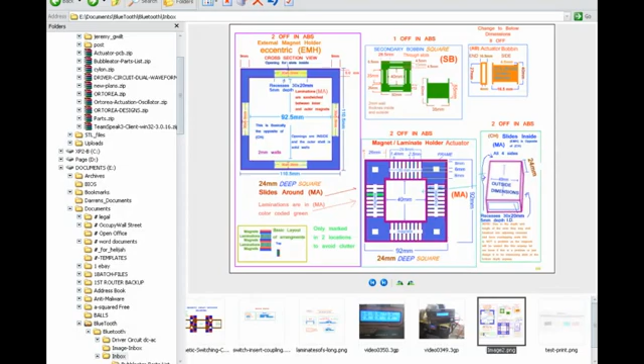Should be live now. Okay, well I'll still be making some changes actually. I need to go back on a minute. And let me just check my audio because I'm not sure if... oh yeah, I'm on the right audio. Can you hear me, Alan? Because I'm not monitoring myself right now. Okay, audio's working. All right.

Right. I'll try to explain it. Let me just get this box out of the way. I'm just going to take a still image so I can paint on this. Okay. This box here. This is a magnet laminate holder, right? There's two of those, and these go on each end of the secondary bobbin, which is this one, right?

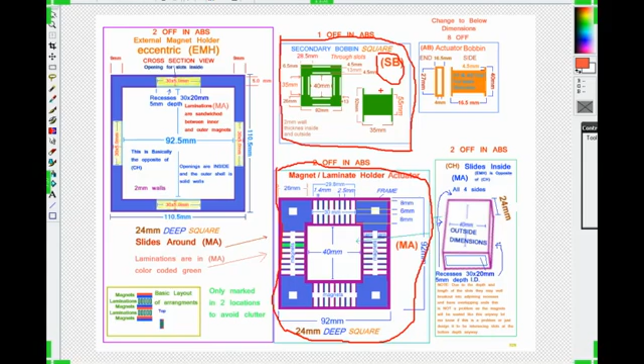So, like I say, magnet laminate holders. There's one on each end of the secondary bobbin, which is SB. That one. Okay, so that's in the middle. That's where the windings are put on that secondary bobbin SB. The main secondary windings for generating the power are actually on that green bobbin, right? I've actually changed the colours a bit on here.

Right, now the actuator bobbin. Let me just clear the screen again. Now the actuator bobbin, ideally I need 4 of these on each end, and they actually go on the ends of the magnet laminate holder. That's the MA. So these actually go around.

Now this is where I've been having some problems because I might have got my dimensions wrong or something, but they're supposed to be... Let me just zoom in. Why is it zooming in? I can't zoom in properly. Just a minute. Right, that's better.

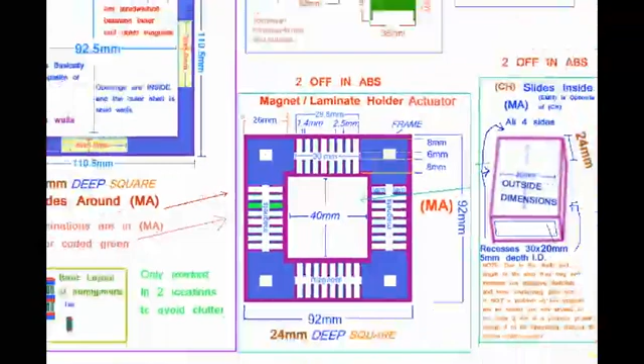Right, those actuator bobbins, one goes across the laminations there to actuate those cores, and another one goes underneath to actuate those cores. But I've been worried about overlap, where they collide with the other ones, which actually go down here. Right, so the actuator bobbins actually go on the ends of the laminations that stick out. So there might be some overlap problem, and I've been looking at changing the sizes a bit.

I certainly don't want to start making my green secondary bobbin and my magnet holders bigger because that's going to mess everything up, because I'm going to have to change everything. The only way to do that is to make the actuator bobbins smaller, and that's probably what I might do. I already made them a little bit smaller. So anyway, basically they all go on the end of the laminations that stick out.

Right, so when you change one dimension on one thing, it affects everything else, right? And obviously they're down here as well. So if I change something, it changes everything else. Now this particular here, this CH. Let me just clear my screen again. Now CH, this thing here, this is the central core. This holds magnets in these slots here, right? There's magnets in here.

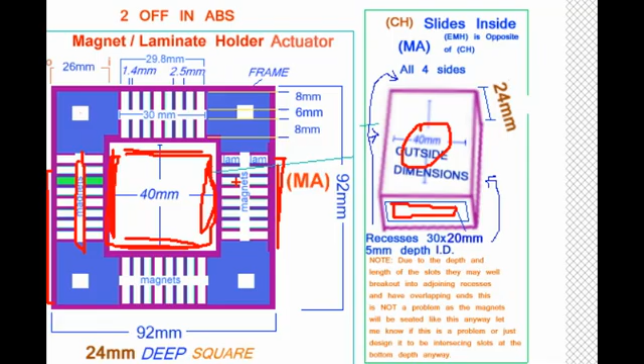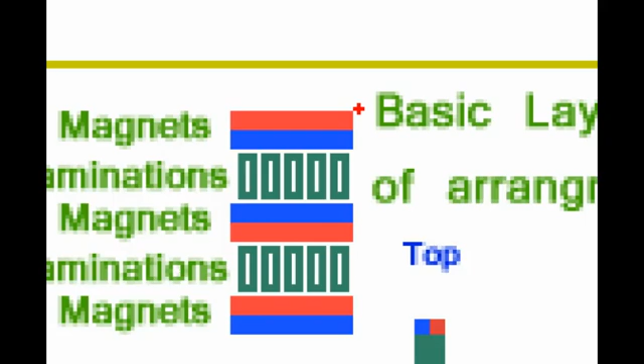So I'm basically making a sandwich of magnets, and if you go down to the bottom sketch down here, that shows you what I'm trying to do. Basically there are magnets on the outside, on the inside, oops, this has got big, and on the out, yeah, you know what I mean. Anyway, I think that probably explains it best.

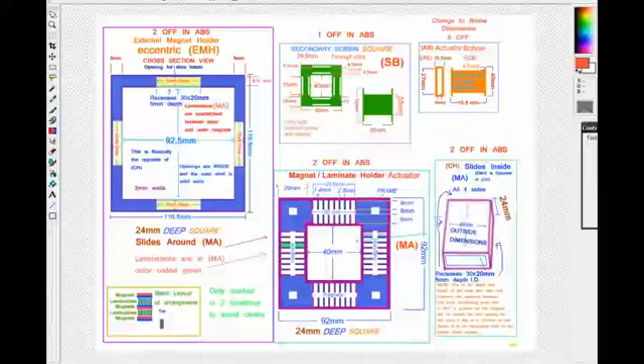Oh, okay, sorry. Slow, did you say slow down? Height. Hang on. Height of secondary bobbin?

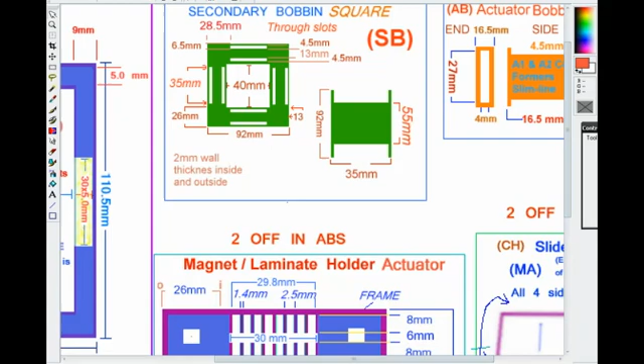Well, the secondary bobbin is basically 92 millimeters by 92 millimeters, you know. It's 92 millimeters this way, it's 92 millimeters that way, and it's actually 35 millimeters tall, right? Because we're looking on the side of this. This is the side view.

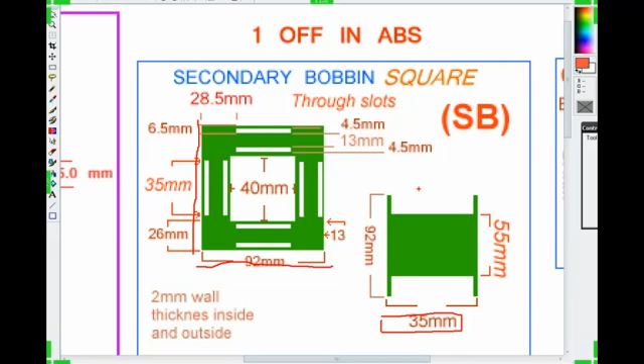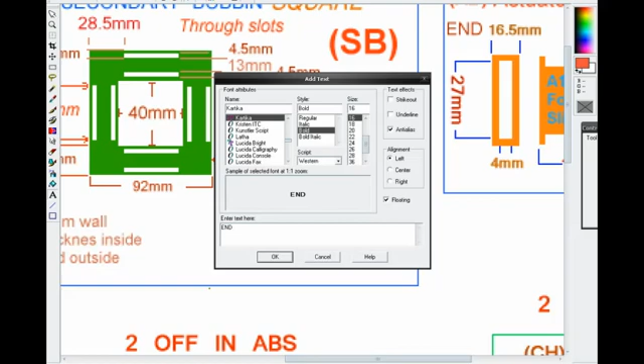I probably should have put that on the drawing, really. Let me just put this on the drawing anyway. This is side. That's the side of it, and that's the end. End view of it. Does that answer that question?

Let me just save that as well, because I made some changes to the AB bobbin. If you look, I've made it smaller, 40 millimeters, 40 millimeters, and that lip is the same. It's a 4.5 millimeter lip that goes all the way around there, but it's kind of difficult to draw it on a flat image. My other 3D print guy had some problems with that, but I told him what, and he just adjusted it. But the trouble is, I think I made it a bit too big.

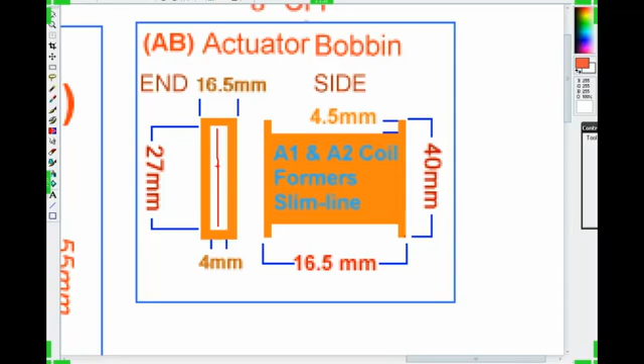So the original drawing was, I think it was 48 or 46 or something. Anyway, I shrunk it down to 40 millimeters, and I'd rather skip using some of the laminations in this section here, right, than have it overlapping over this section here, because I made it 40 because it's going to be like 40 millimeters up to that edge, and I might actually have problems when the other one overlaps there. So yeah, it's all this measurement stuff. It's very confusing.

It kind of gets very confusing sometimes, and you get little mistakes that creep in. But I'm not too worried about that, because I might actually have to make that a bit smaller, but then I might have to skip putting laminations in one of these ends here. So if I have no laminations at these two end points, I'm not too worried, because the flux is still going to be channeled by the majority of them anyway in that section.

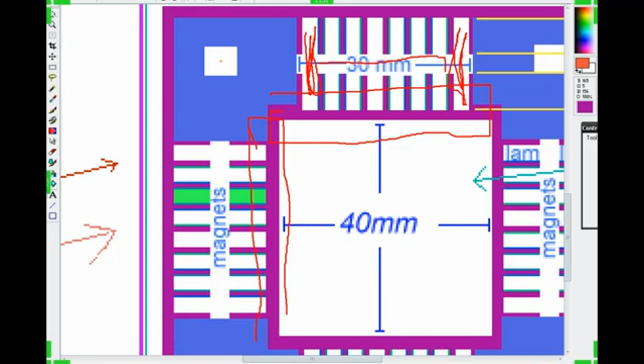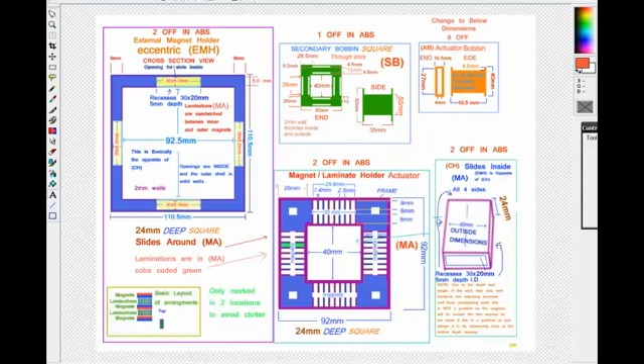Oh, the side view shows 55mm thick. Hang on a minute, have I made a mistake? A side view. Let me have a look. I might have made a mistake. Yeah, you might have spotted something. It's 35mm. Oh, hang on a minute. No. 55mm, that's the inside diameter of the bobbin. That's where the wires are sitting.

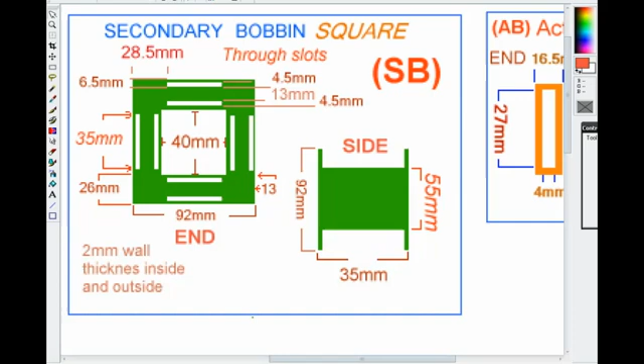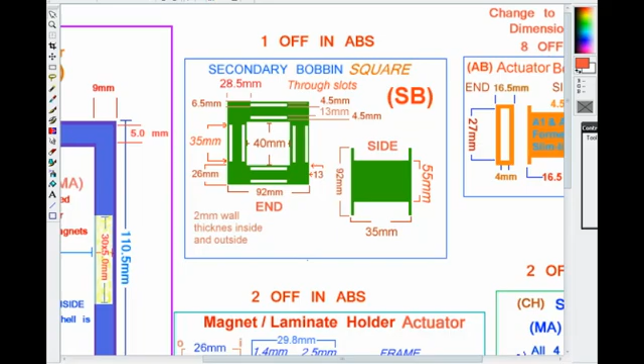Let's see. Just a minute. Oh, right, hang on. The best way to understand this is to look at the actuator bobbin, the actuator for the magnet holder, right? Yeah, I might have made some kind of a mistake. Sometimes I don't notice these things. The windings have to sit above the laminations.

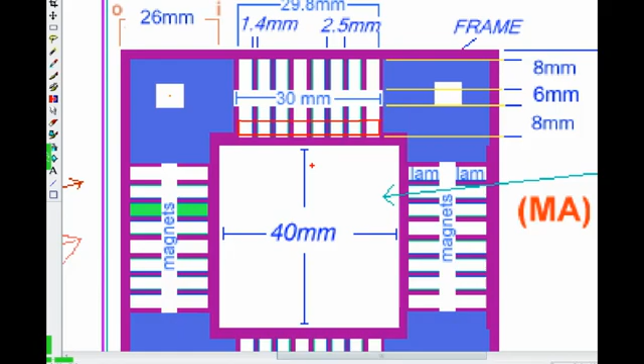So the laminations are actually, just a minute, I'm trying to work this out. The laminations occupy an area on each side, right? There's an area of laminations on each side of this that feed through those slots, on each side. And the laminations are 3mm, oh, actually I think it's 3.5mm. I might have increased them to 4 though. But there's a 2mm wall, right?

Let me just zoom in a bit more, because it's hard to see on a live stream. This wall, oops. Sorry, it's hard to draw on here. This wall here is 2mm, right? That's the thickness between the inside hollow part and the actual bobbin seat on the inside. So there's 2mm on each side, so that's 4mm.

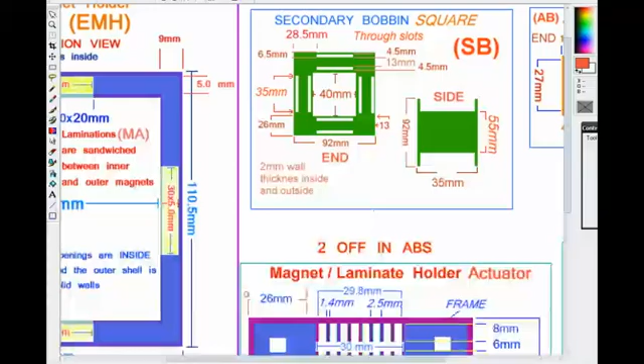Now, the laminations themselves are another 4mm, right? We're going to go on the conservative side. So there's 4mm there, and this is on both sides. Then there's another 2mm wall for the inside of the bobbin. So the laminations are 4 plus 2 plus 2, that's 8mm. Now if you go back to the other drawing, what does it say?

8mm, right? There's 8mm. Oh, hang on. Yeah, you could. You might have. Yeah, I might have made a mistake somewhere. Normally, these little mistakes are revealed to me by my 3D printer guy when he sends me the print model designs back, and I look at it and I think, oh, I've made a mistake there, and I usually tell him to correct it. You see, because I'm not very good with numbers.

But now let's see, just a minute. Hang on. That's right, because the laminations themselves are actually 4 millimeters, right? But there's a piece of the magnetic switch that is also 4 millimeters. So we're ignoring the magnetic switch part because that's only in this part of the magnet holder, right? So all we're counting really is the 4 millimeter laminations, and the 2 millimeter wall, which is the thickness of this area.

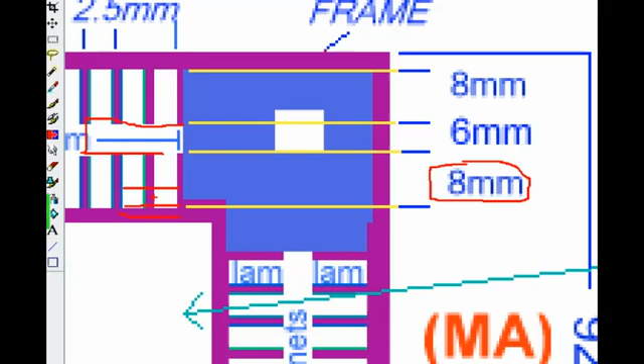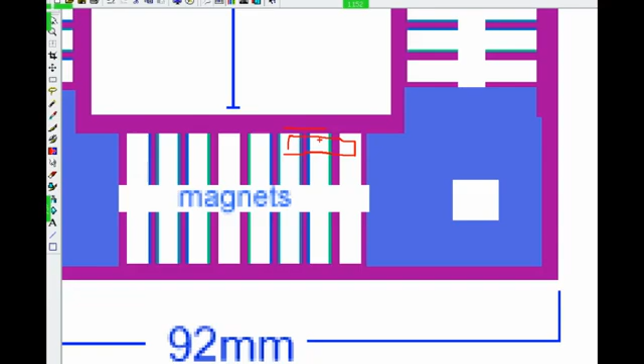So it's 4 plus 2 is 6. So we've got 6 millimeters in on each side. So 6 millimeters on this side. Let me just get out of this. 6 millimeters on this other side. So that's 2, and that's another 4, right? Because we're not counting the magnetic switch on this one. So 4 plus 2 is 6. So 6 on this side, 6 on the other side, that's 12.

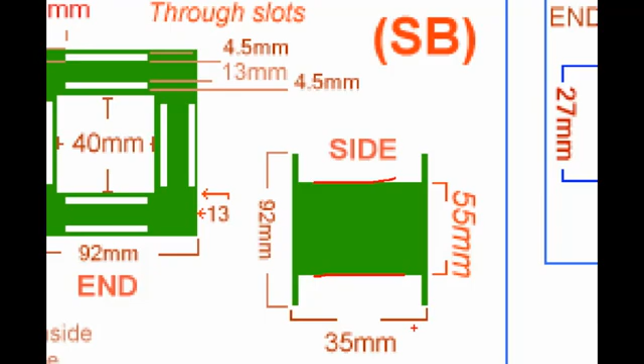Right? So technically speaking, there should be a 12 millimeter. This secondary bobbin, that surface should be about 12 millimeters above, across the whole width. That's 6 on each side, so it should be 6 millimeters on each side above that inside. Let me just go and read chat again.

+42, 53. So have I made a mistake then? Because 53. So you're saying I should have 53, where 55 is. Yeah, I'm glad you spotted that. Let me just check this. Hang on. So you're saying I should have 53 on there. So that should be 53 then, instead of 55.

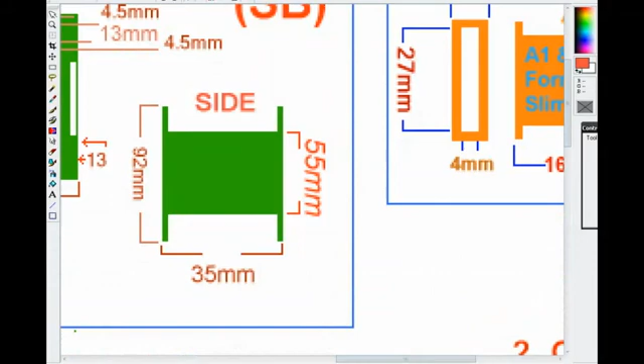Yeah, I probably made a mistake. It's numbers that get me. I've told people I'm not good with math. I do make mistakes, and obviously it can be costly as well. And I'm glad that you spotted that because I didn't see that. What I need to do is print this out on a piece of paper and mark it off.

Oh, the laminations you mean? If I want the laminations to be 4.5 instead of 4, okay, might be a math challenge. Well, I did actually change my laminations a bit. I made them a bit bigger. Let's just go back to my drawing for laminations. I have been making improvements. I've actually taken them up to 4 millimeters. With these new rasp files, I'm really not worried about having to file out a bit because these new bobbins are going to be a damn sight easier to file out, and I wanted a bit more iron in there anyway.

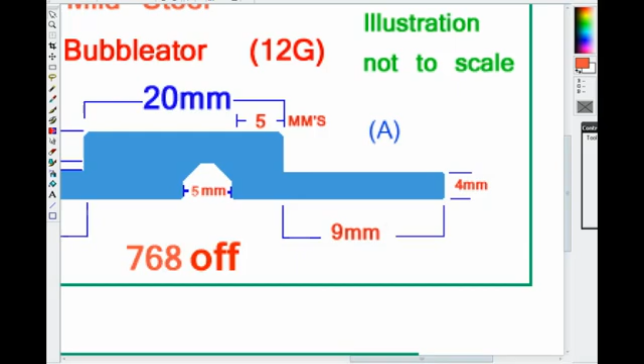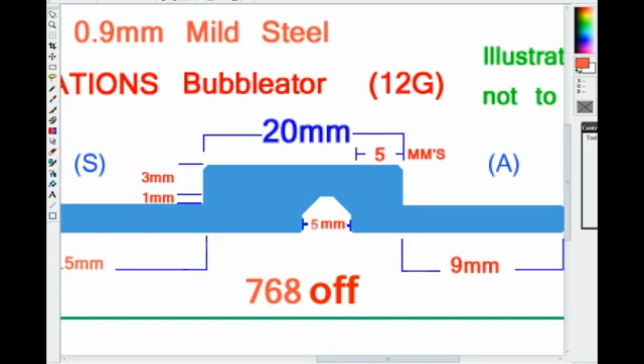So I've actually taken them from 3.5, because the previous design was 3.5. Now, if you look at the new design, the magnetic switch part is 3 plus 1, which is 4 millimeters, plus 4 millimeters. So the laminations are going to be the only part going through the actual secondary bobbin, the 4 millimeter part.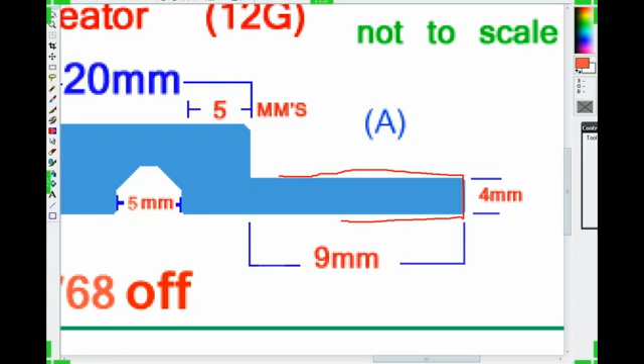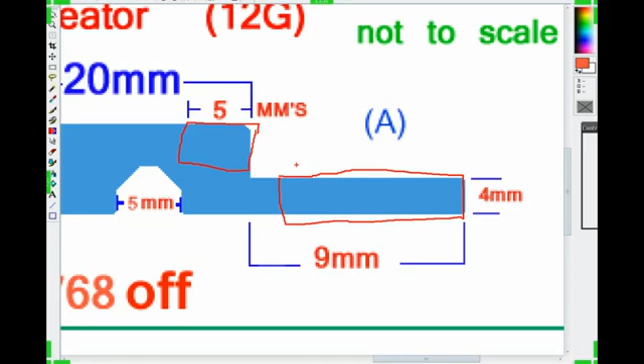So this part will be going through the secondary bobbin, but this part will not, because it only goes through the magnetic switch, the actuator. It only goes through this piece here, in the box, the actuator magnet holder. It doesn't go through the bobbin. So only this goes through the bobbin, right?

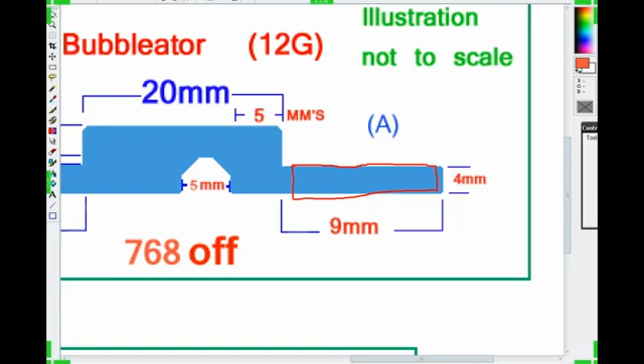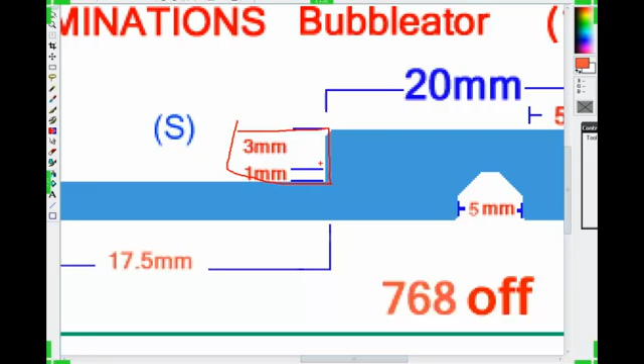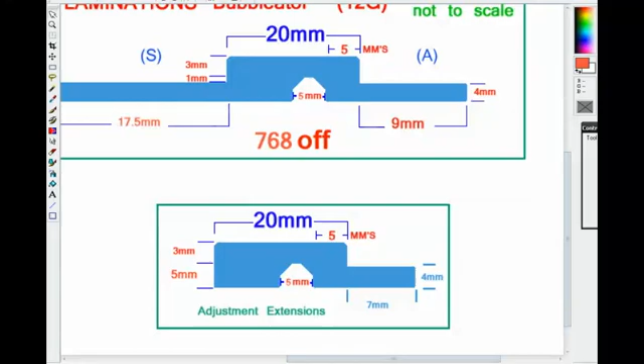So the gap that we have in the bobbin basically consists of two of these, right? These sections are the space that we have for the windings, basically. So we have 4 millimeters plus 4 millimeters, which is 8 millimeters. So we have an 8 millimeter. Because, hang on, plus the magnets as well, because the magnets are actually seated. Oh, just a minute. Sorry about this. The magnets are seated on here, right?

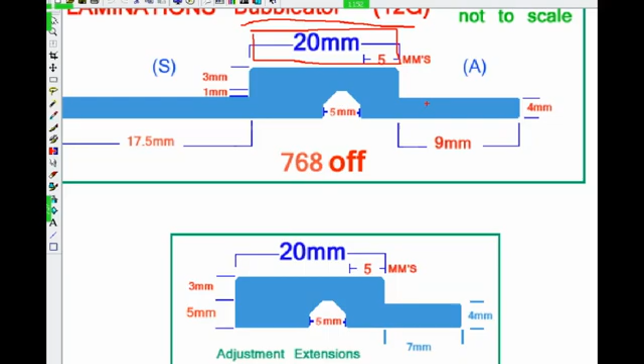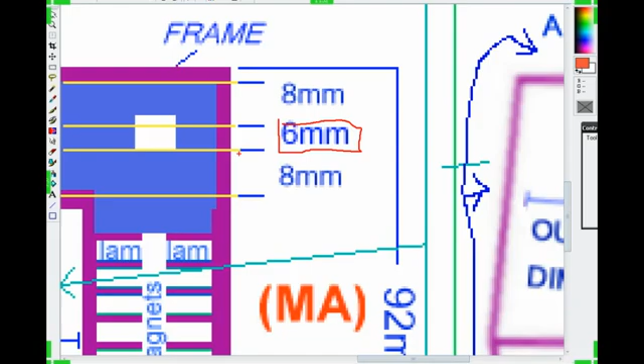And then the other laminations on the other side, at the top, up here, right? So we have the thickness of the magnets, which is, I think it's 6 millimeters, right? The thickness of the magnets is 6 millimeters. That's this piece. The magnets are going to be made up of 3 magnets stacked on top of each other. So we have the magnets, which consist of, sorry about this, it always does that when I zoom in, 6 millimeters of the magnets.

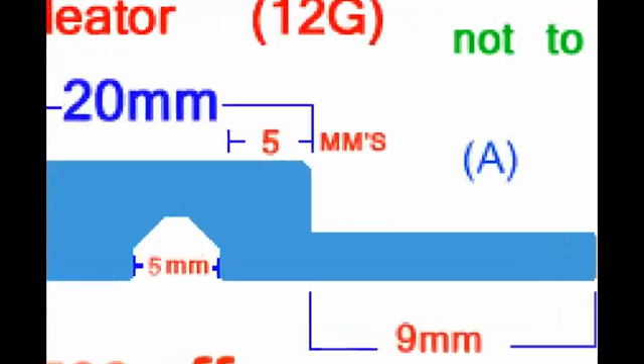Then we have our spaces on here, which is 4. So that's 4 plus 4 plus 6. So we have 6, 7, 8, 9, 10, 11, 12, 13, 14. We have 14 millimeters of space for the coils to be wound.

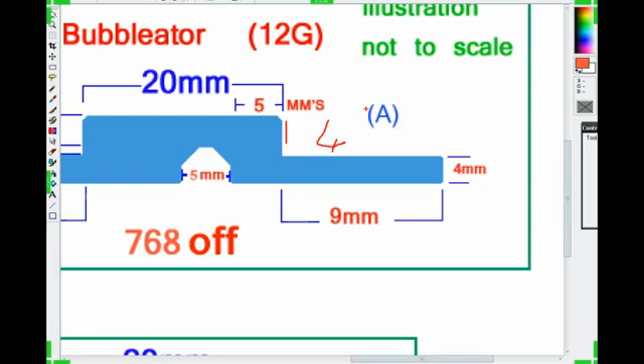Let me just check the chat. Okay, alright, Alan, if you're going to draw them, that would help, because I'm useless. I really can't draw in 3D. I have a hard time just drawing 2-dimensional pictures, to be honest with you. I'll have a look. So I'll create a free account, then I can look at your drawings. Is that what you're saying?

Hang on. So, what if I create an account? I can look at your stuff. Right. Okay. Yeah. That way. Obviously, we can collaborate with that. All right. Well, I'll make an account then. I don't like cloud stuff really, to be honest with you. But I bet it's associated with Google and all that. But what the hell?

Oh God, I hate robots. They're asking questions already. Go away, box. I don't want to talk to a robot.

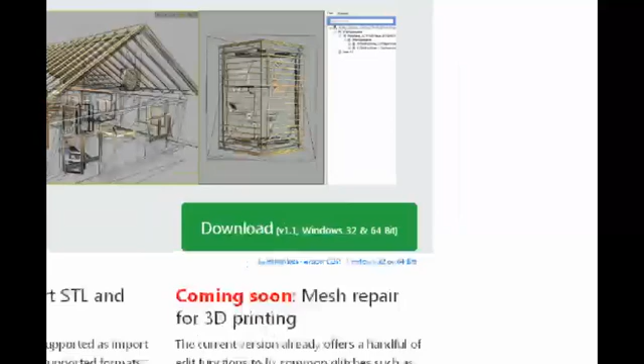Oh, there's a free STL viewer. That might work. Look at this one. Download Windows 32/64-bit. I'm going to install this and try it. Save. Just a minute. I want to put it in emulators because it is an emulator. Come on. STL viewer. Let me just stick it in here. Flipping heck, it won't go in the folder. Right, I'm saving that. I'm going to try and install it.

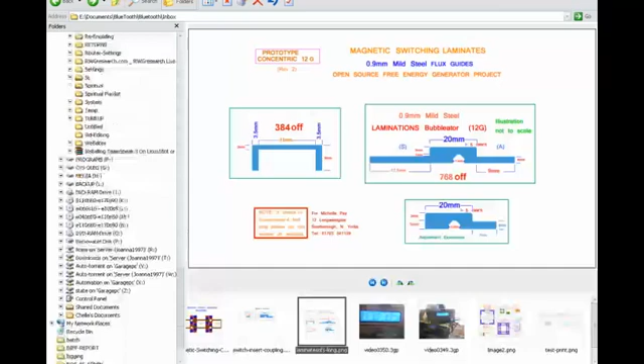Should be in here somewhere. Emulators. Where is it? There it is. I can't see, my eyes are terrible. Alright, it's downloaded. I'm just going to scan it first. I always scan everything when I download stuff. Hang on.

Oh right, okay. I got your email address, Alan. You want my email address? Hang on, let me just get you. I've got your email in here somewhere. I saved it when you gave me it last time. I'll just send you an email, and you'll have my email address. Just a minute. Right. I'm just going to send you a quick email so you've got my email.